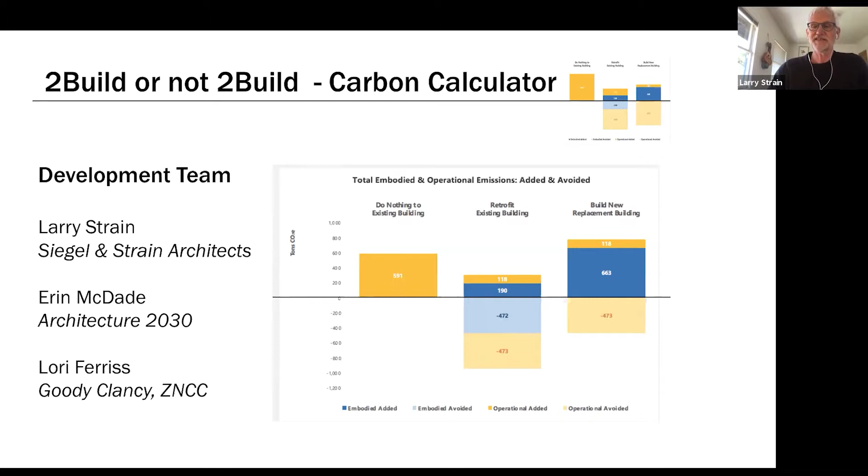Operating emissions are from existing buildings, because you can't have an emission from a building until it's built. The embodied emissions are almost all from new buildings. So one way to bring those two down is to reduce the operating emissions of existing buildings and build fewer new buildings. Remodel more buildings, which will let you build fewer new buildings, which will reduce the embodied emissions from new buildings.

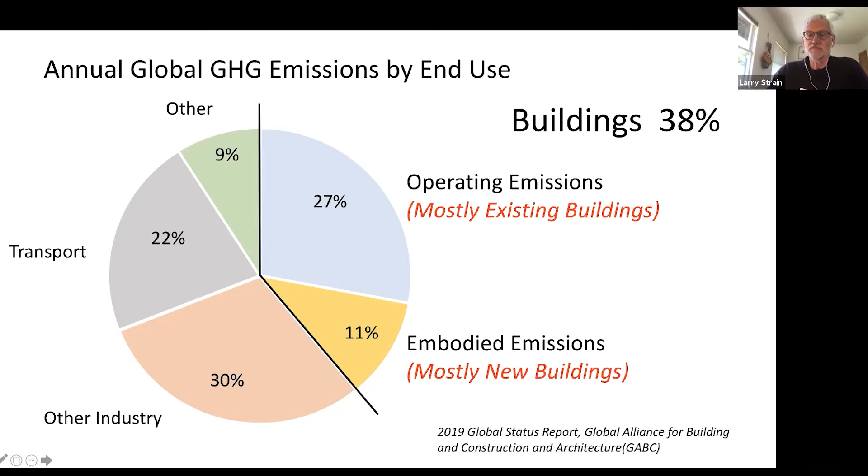Reusing and upgrading what we have is going to be a key strategy to solving the climate emergency we are in. It accomplishes these two things. The upgrade part reduces current operating emissions from existing buildings. The reuse part makes it possible to build fewer new buildings, thereby reducing future embodied emissions as well.

But to date, we haven't had a tool that could compare all the variables for embodied carbon and operating carbon over different timeframes. Retrofitting an existing building to zero net emissions will always be the lowest carbon option. But what if you can only improve its efficiency by 50%? What if you can replace it with a new net zero emission building?

Does it still make sense to retrofit, or should you build a new one? And how does climate and grid efficiency affect those calculations?

So we set out to create a simple, easy to use tool that could compare all of the carbon emissions—operating, embodied, and avoided—of a new building, a building retrofit, and an existing building. We wanted to be able to compare a variety of existing, new, and reuse scenarios over different timeframes.

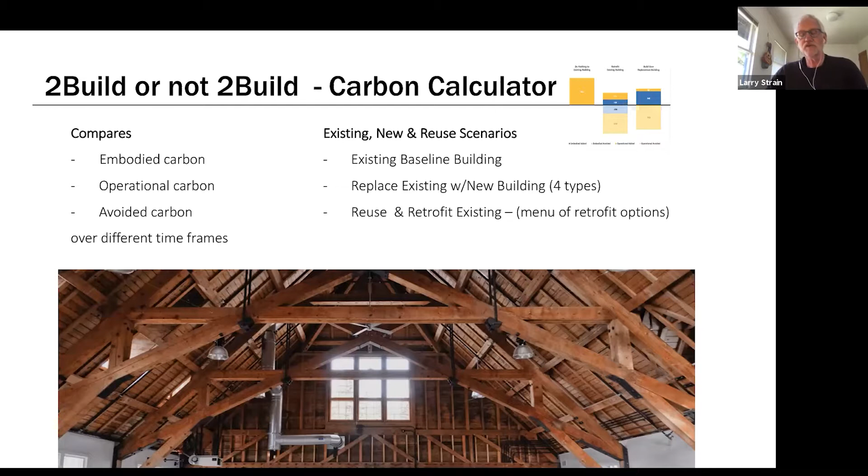I should say that the current version is really an estimating tool for planners and building owners. It's not actually a design tool that can be used by designers in the early stages. It's really to tell you whether you should be building a new building at all or retrofitting what you have.

So a little bit about the project history and how we started.

The catalyst for our calculator was an ex-employee of Siegel and Strain who was working for the Office of the President at the University of California. He called me up one day and asked me if I knew of a tool they could use to estimate total carbon emissions in the early planning stages of a project. I told him we all wanted a tool like that, and as far as I knew, it didn't exist.

Life cycle assessment tools like Tally need a building that's already designed. He wanted a tool that could help them decide whether to design and build a building in the first place.

I got to thinking about it, and I knew something about embodied carbon emissions, not as much about operating emissions, so I called another ex-employee and some mechanical engineers I knew and got some rough emission numbers for building operations, and made this very simple calculator in Excel that could also graph out the results.

So this one had a few choices you could make about your existing building assumption, what's your new efficient building. It gives you the two different kinds of emissions, embodied and operating, for different new buildings and different retrofit buildings.

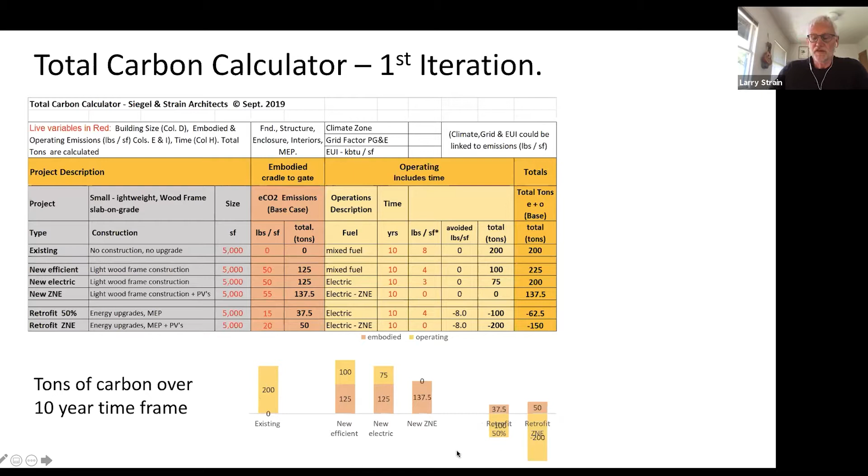So I took this calculator and showed it to the people at the Carbon Positive Conference in Chicago in October of 2019. And Erin McDade of Architecture 2030 thought it had promise and offered to help.

So it was pretty limited, but it worked pretty well, and it gave you all these different outputs, and we were pretty happy with it.

We showed it around, and there was a lot of interest in this tool, particularly from a group of historic building architects who were just forming the Zero Net Carbon Collaborative, which is a group of historic architects primarily who were really focused on existing buildings as one of the key solutions to climate emergency, climate change.

People wanted to get their hands on it, but we knew it wasn't really ready for prime time yet.

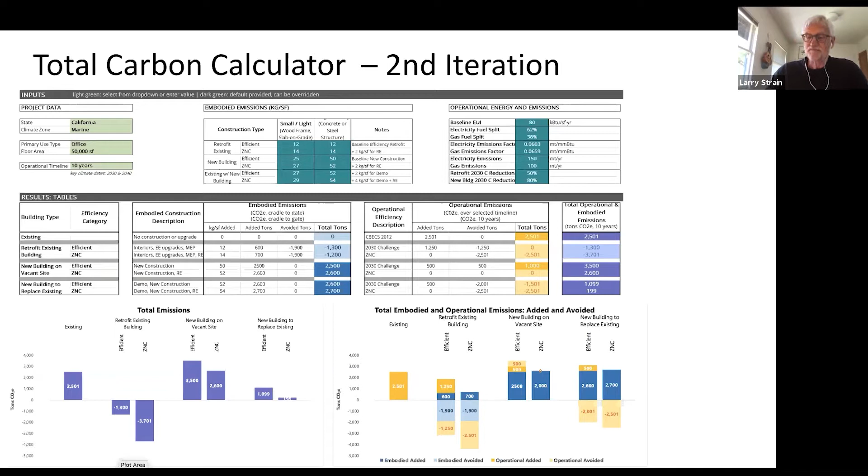So the current version—we heard about a grant. A friend of mine told me about a grant program from one workplace that was giving out innovation grants to firms working on the built environment.

In August, we applied for it and received a ONEder grant to continue to develop the tool. Erin and I added Lori Ferriss from Goody Clancy, one of the organizers of the Zero Net Carbon Collaborative, to our core team, and we put together a high-powered advisory committee as well.

We called our tool the To Build or Not to Build carbon calculator and got to work refining it. Our goals were to define the emissions for various building types of existing buildings to set the baseline, to define the emissions for a range of remodeling and retrofit options, and to define the emissions for a range of new replacement buildings, not just the two we had started with.

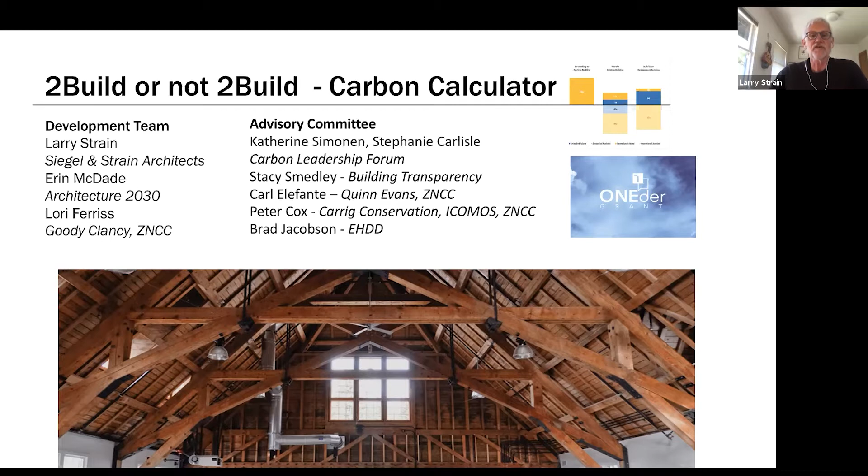So the way that the existing buildings work is there's a database out there—actually two databases. One's called CBECS and one's called RECS, the Commercial Building Energy Consumption Survey and the Residential Energy Consumption Survey. And these have been going on for a long time.

The Department of Energy, the Energy Information Administration, publishes these results every 5 to 10 years. And they do a survey of all these different types of buildings and set the baseline energy consumption for those buildings. So that gives us a place to start. If we're starting with an office building and looking at whether to replace it, we know what the baseline emissions for that building should be.

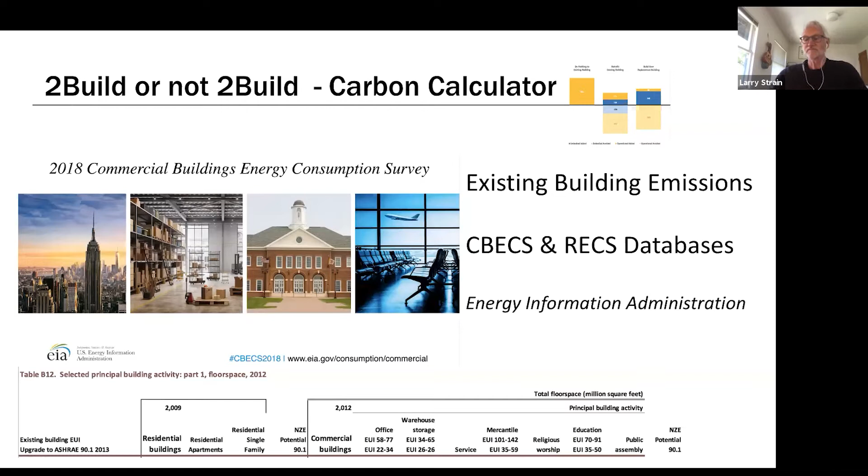Then we came up with 4 new building types. We wanted 4 distinct types of buildings that had different embodied carbon footprints. Really, these are based on size, materials, and structural systems, not really the building use.

The light wood frame building, which is typically a house but doesn't have to be, could be a commercial building, has an embodied carbon footprint of about this range. The mixed wood concrete - usually this is something like a wood frame building over a concrete parking deck for residential, low-rise residential. And we have a mid-rise concrete and steel building. And we have a high carbon building, which typically are either really tall buildings or very carbon intensive buildings like blast proof buildings and things like that.

So we had this range of buildings. You pick the building that you're thinking most matches what you would replace your existing building with. And that's where you set your baseline for the new building.

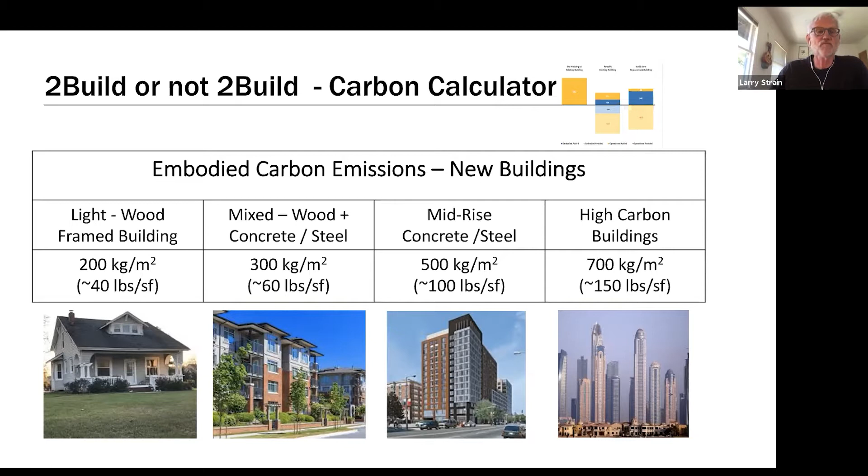Then we came up with a menu of different retrofit options for what you could do to your building. There's MEP upgrades, envelope upgrades, interiors, different types of interiors. We wanted this to stay very simple, but just to give us a quick check on what you would do to the building if you're going to remodel it. Each one of these has a different embodied carbon footprint - each box comes with a different footprint.

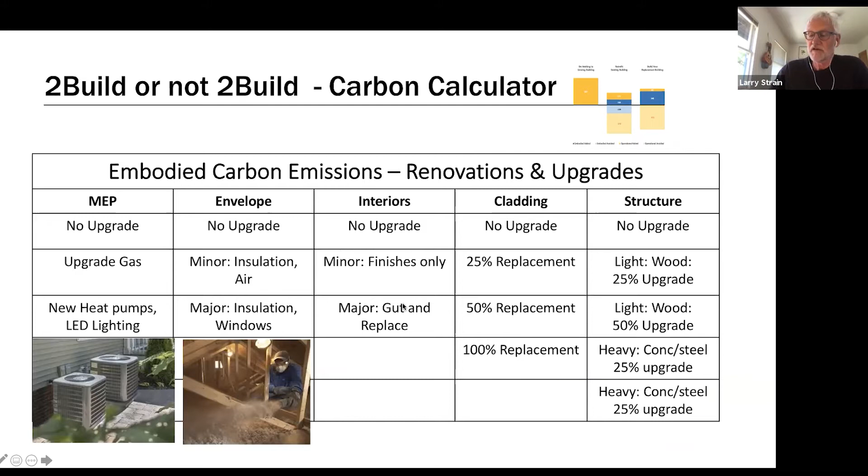Then you can set your operational emissions. Your baseline building is set by your CBECS or RECS databases. And your retrofit is just picking your target, how much better you think you're going to be than that. So your mechanical engineer, you work with that and get a sense of the new buildings basically.

So you're going for better than the existing building for the retrofit. And the new building's basically set by code average for Title 24 or ASHRAE 90.1. So these are probably about twice as good as these existing buildings to start with. That's your baseline, and then you can go from better than that - so you get to set where you think you're going to be.

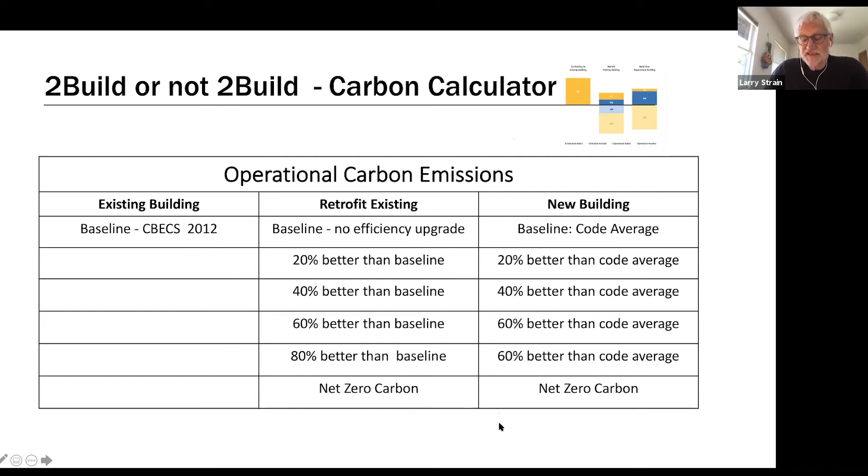And all that plots out - if you put all that data in your building, it plots out where you are. So I'm going to hand it over to Lori to show you that in a minute, but I wanted to talk a little bit about where we started when we applied for this grant.

These were our goals and the methodology we set out to look at this with. We needed to collect construction and emissions data for both new buildings and renovation projects. We needed to collect life cycle assessment data for both new and renovation projects. We wanted to then review and update all of our emission assumptions, which we'd put into this based on our own knowledge of LCA and life cycle assessment.

We wanted to add more building types than just the 2 we started with, and a lot of remodeling options. We didn't have any of those except for just building interiors. And ultimately, we wanted to convert the Excel-based calculator into a web-based tool. We haven't achieved that last goal yet, but we're well on the way to achieving all these others.

And the primary use was really high-level decision-making at early design stages. This is not a design tool - I want to make that clear. It's really to let you know, should we be building a new building or not?

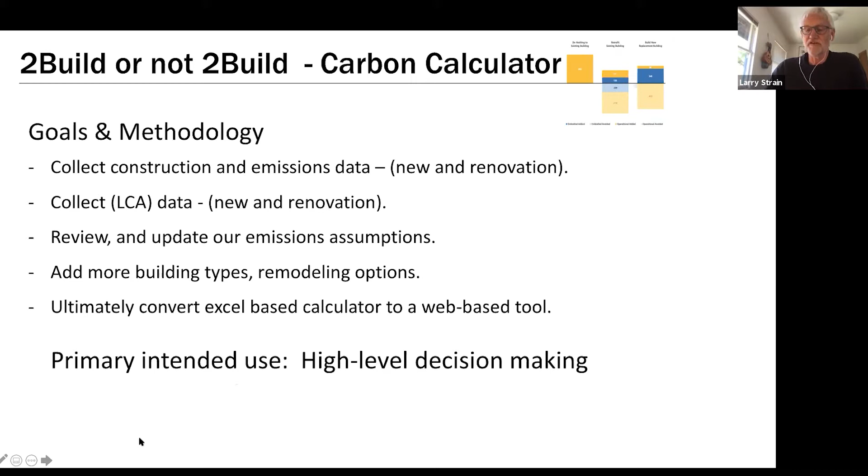So we set up some focus groups to help us sort through the data and figure out what data we needed. One of them was the energy mechanical focus group. And since we're not mechanical engineers, we mostly just asked them questions like: what are typical mechanical systems for new buildings and building retrofits? How do they vary by use, size, and climate? What are the issues with electrifying existing buildings?

And then we wanted to come up with some initial estimates for embodied carbon for each of those different kinds of mechanical systems, so we could plug those into our embodied carbon baseline. And we wanted to know some typical energy use intensities for new buildings, retrofits, and things like that. So mostly we're asking them questions, and we're now starting to get input and feedback back from this group.

At this point, I'd like to hand it off to Lori to talk about the next focus group and lead into a presentation of a project.

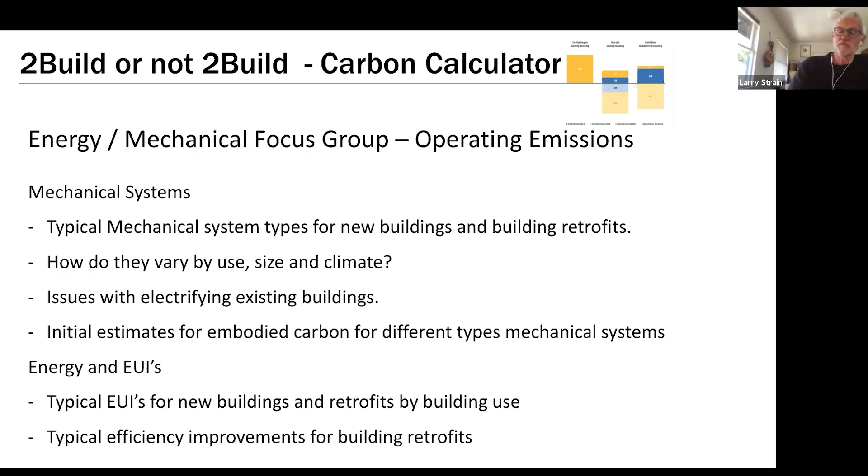In addition to the MEP focus group, we also convened an existing buildings focus group to talk to preservation and building reuse experts, to understand how the tool responds to all the parameters and challenges of reusing existing buildings. The feedback we got was similar to feedback from our primary advisory group and the MEP group: first, that the value of this tool is as a high level tool, a first step in understanding total carbon, not as a design tool. That was important to keep as a focus.

One request was to allow users to understand which factors within those drop-down menus have the biggest impact. So if you're going to reuse a building or build new and want to do better, what are the levers to pull to really show improvement?

Again, going back to interface, it's really important to see all of the options and results on a single page so it's very easy to understand and digest.

Consider this next point: consider ranges rather than absolutes. It's about providing drop-down selections that reflect what people are seeing, because the people using this tool may not be technical experts. It's important that they see options that reflect what they're familiar with and what their project actually looks like.

And the last point is about coordinating with other embodied carbon tools out there. There are existing LCA tools, and a lot of design tools and life cycle assessment tools being developed. So how do we make sure the data is all aligned so you can move seamlessly from one tool to the next and really compare apples to apples?

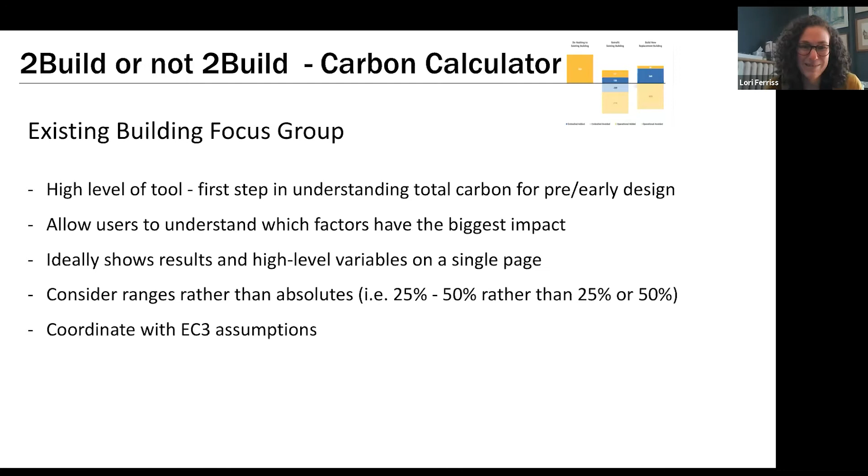Next. Oh, am I? Can you keep advancing? I have to advance, is that right? Yes, there we go. Next slide, thank you. Thanks.

So this is where we landed. This is the current Excel user interface of the carbon calculator. You can see on the left side those gray boxes are all the inputs, which I'll walk through, and on the right side are the results. This is, at the top, the general project and building information.

Below that is a box about the renovation: what's the scope of the renovation and what kind of energy efficiency are you aiming to achieve? The next box is all about the new building, the hypothetical replacement building. At the bottom are embodied emissions modifiers. These are important because there are factors like poor soils or blast resistance that really impact embodied carbon, but it's impossible to capture all of them in a drop down. So the point of these is to allow you to check a box that makes this simple tool as broadly applicable to a wide range of projects as possible.

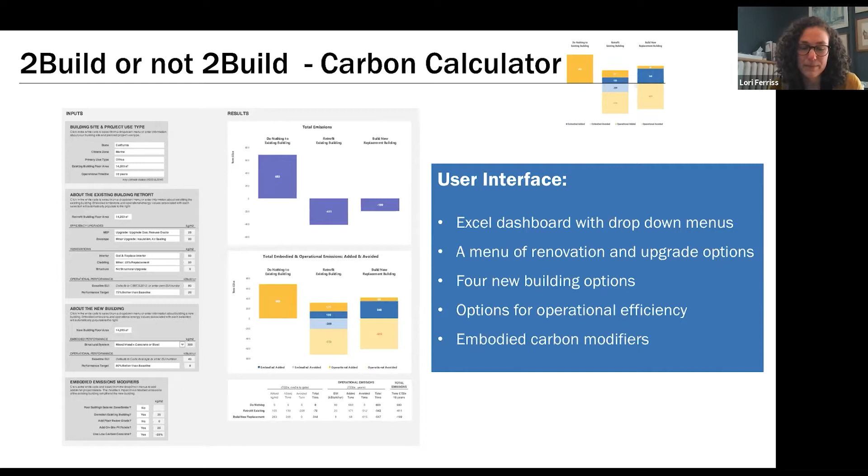Okay, so I'm going to walk through a project example to show you how this works. The building we're looking at is a 1950s international style building, which was purpose-built as a Hillel Center for Boston University and was renovated in 2014 into an admissions center.

This was a comprehensive renovation. It included completely reconfiguring the interiors, and it also involved a lot of performance upgrades: new high performance glazing, insulation at all the walls as well as the roofs, and new high efficiency building systems. But through all of this work, the majority of the original structure and enclosure were preserved and restored. Through the project, the operational efficiency of the building was improved by 70%.

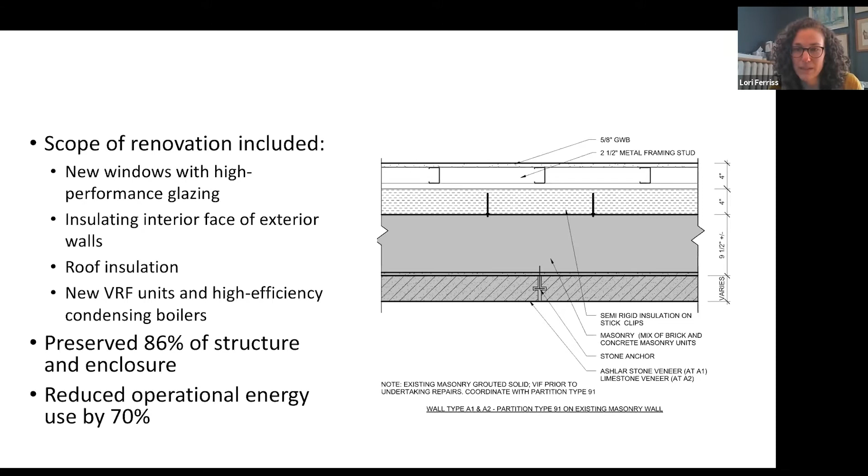Okay, so we can start to enter this, model this using the tool. That first box, the project information, we start with the location, which pulls from that CBECS database the climate zone you're in. We then ask for the primary use type, and the CBECS use type gives you a range of what the expected energy use might be based on what the building is primarily used for. And then square footage and operational timeline.

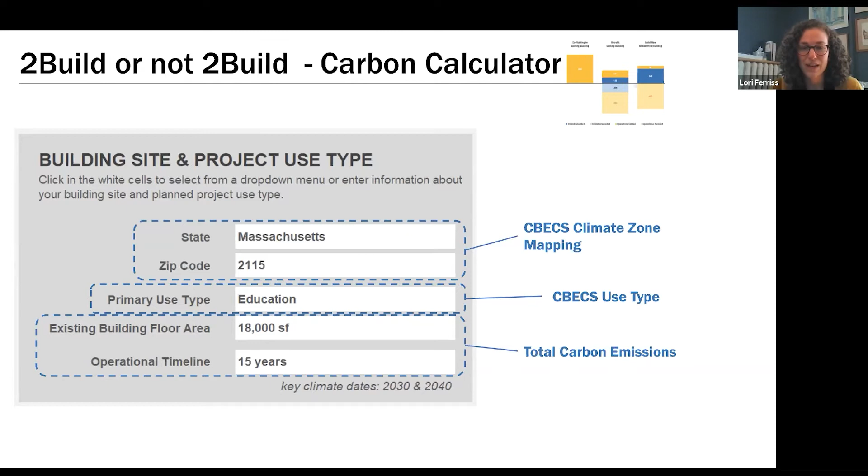The operational timeline is really important because when we're talking about the need to get to carbon neutral by 2050, and to make greater than 50% reductions within the next 10 years, it's important to define that duration we're looking at for total carbon emissions.

So here we're saying 15 years. These are all about the renovation. So both for the renovation and new construction, we have a floor area box where you can enter the floor area, and this is because we know that typically when you reuse a building, the floor area changes. And if you demolish and replace it, you're likely adding square footage. So we want to be able to capture that variable here.

The next set of efficiency upgrades and renovation drop-down menus are all about embodied carbon of the renovation. So this gives you options for what different renovation strategies might look like. In this case, for example, we're replacing all of the MEP systems. We're doing a major upgrade of the envelope. We're gutting the interior, et cetera, and each of those decisions results in some embodied carbon emissions.

And then at the bottom, you can input your operational performance, and here we're showing 80% better than baseline, but this is really the performance target, or what level of energy efficiency you're aiming for, which then the calculator converts to operational carbon emissions based on your locale and your grid data. Next.

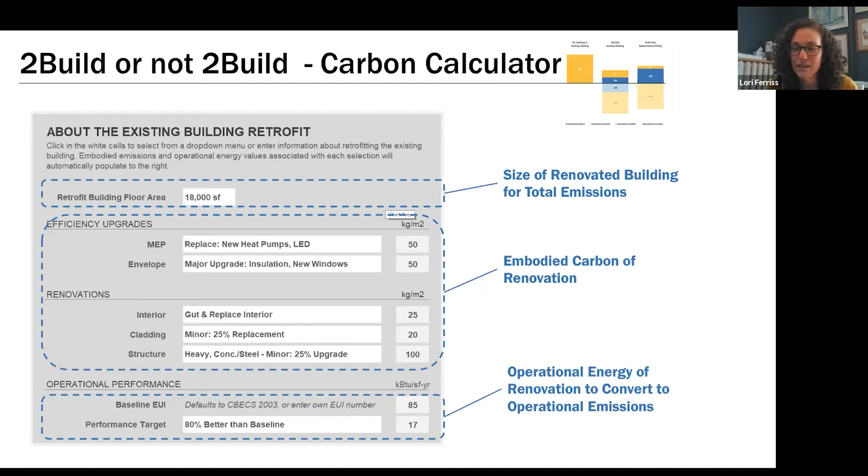The next input box is about the new building. This one's a little bit simpler. As Larry mentioned, we provide the floor area here, and then you choose from one of those four building types. So here, this is that mid-rise concrete or steel, typical construction, and then the performance target.

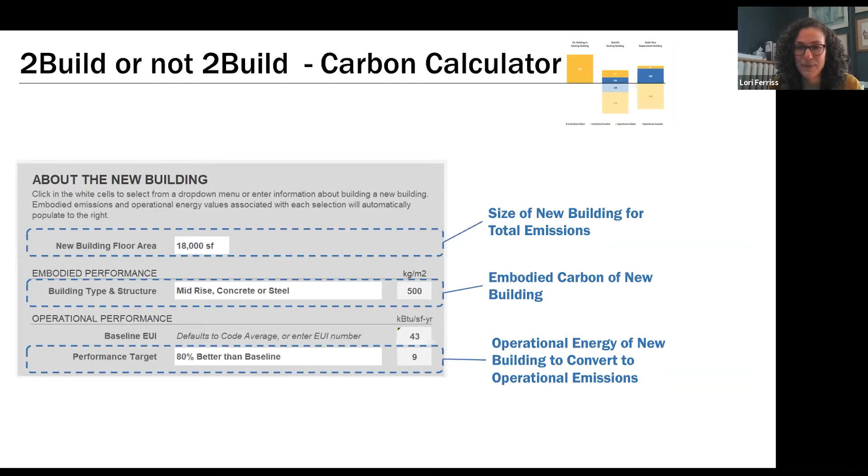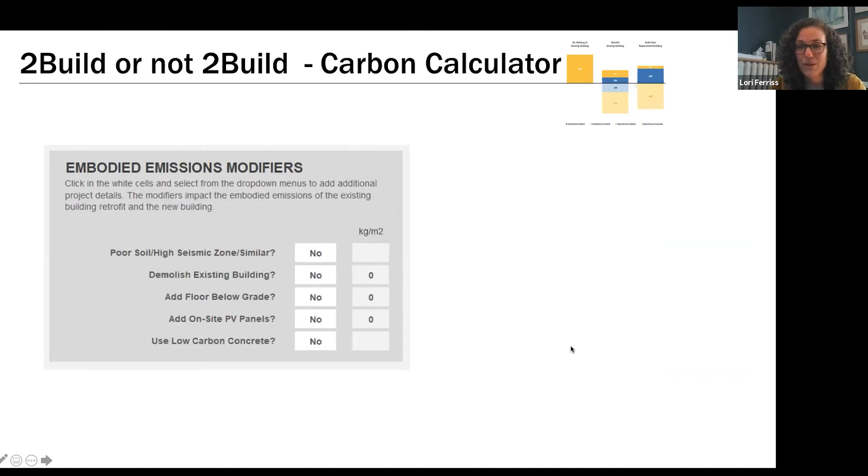And here I'm comparing this to an 80% better than baseline. So this is almost a net zero building. Just for the sake of comparison, we're saying that this is a very, very high performance new building. Next. And in this case, there aren't any embodied emissions modifiers, but you could imagine that, if we had used low carbon concrete, for example, the embodied carbon would go down, or if we had poor soils, it would go up. Next.

And the first chart, this is one of the result charts. I'll start with the more detailed one to walk you through. You can see these three columns. On the left is total carbon emissions over that 15 years that we input. On the left is the existing building if you do nothing to it. In the middle is the retrofit scenario that we defined. And on the right is the replacement scenario.

You can see in the dark yellow and dark blue are the embodied emissions and the operational emissions. So these are emissions that are coming from each of these projects. And then the light blue and the light yellow are the avoided emissions. So these are all of the emissions that we're saving essentially by the decisions we make. So, for example, the existing building has no blue if you do nothing to it because there's no embodied carbon added. It's just operating as it always has been.

Whereas if you retrofit a building, there's some embodied carbon emissions. And if you replace it, there are usually substantially more embodied carbon emissions. And then looking at those light numbers, you're avoiding operational emissions by improving energy efficiency, and you're avoiding embodied emissions by reusing the existing building fabric rather than replacing it with new material. Next.

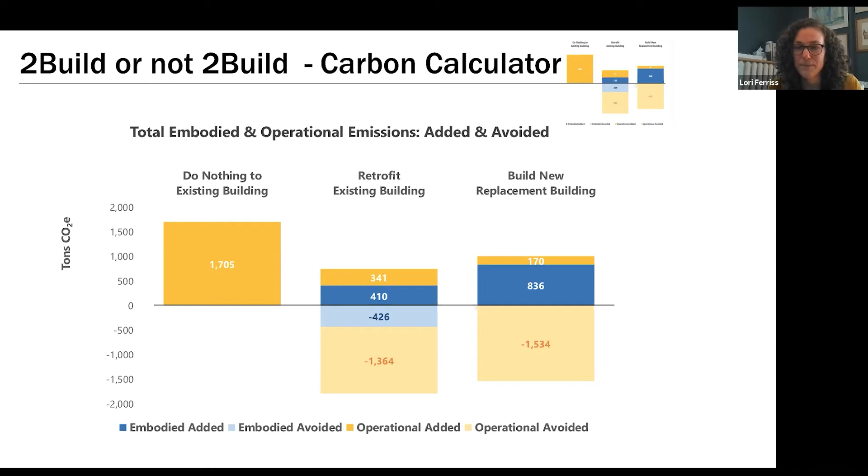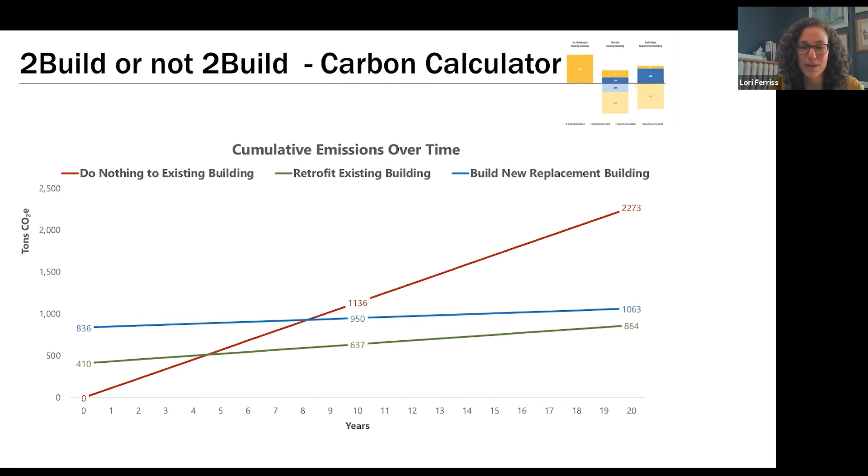So in this case, reusing the existing building is the lowest carbon option for the next 20 years. But you can imagine how the embodied carbon, so that starting point and the slope, might change depending on those different decisions or drop-down menu selections you make.

Next slide. So that's where we are now. This is still a work in progress. There's plenty to do, and we're still working. So next slide. We've started to solicit feedback from our beta testers. We've sent the spreadsheet as it is to those people in our advisory groups, as well as others who have been helping us along the way.

We've received some feedback. First, about interface. It would be nice to be able to compare options. And I'll preface this by saying that most of this feedback comes from technical experts and practitioners, especially. So we found that people want more detail and more options for their own use. They like to see multiple renovation options against each other. We definitely understand that it would be helpful to have more mechanical systems options, so that when you select something in the dropdown, it reflects the choices that you're actually presented with in real life.

People would like to be able to enter their own energy use intensity and embodied carbon rather than have those as dropdowns, so that if they have that data, they can input it. And we've had many requests for an advanced user option, whether that's a separate tab or, in a web interface, a button you could check that allows you more granularity. And again, as Larry mentioned, this is not a design tool, but the more we talk to practitioners, the more they would like some design tool capabilities here. So that could be a next step.

And then on the data front, we've had requests to incorporate future grid emissions data, because we know electric grids everywhere are becoming cleaner. So linking to databases to reflect that, as well as using location to tie to local energy code requirements and data so that the energy performance inputs are less of a guess and more based on the requirements in your jurisdiction.

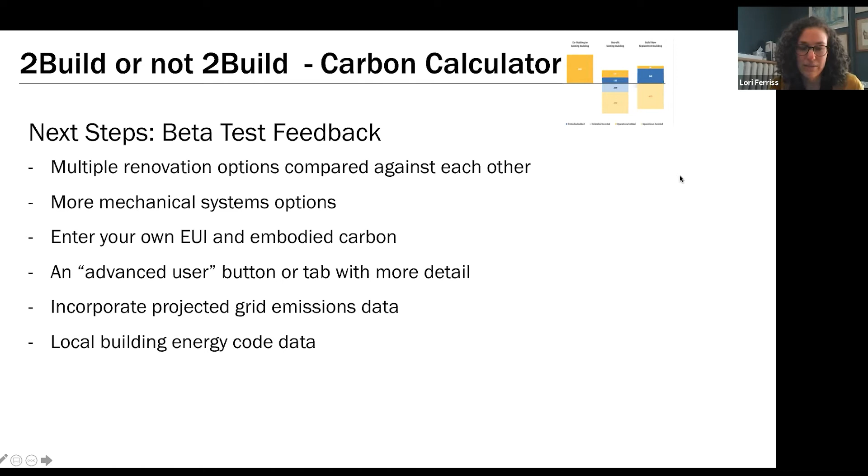Next. Let's see here. We're also collecting data. There are a lot of data assumptions built into this calculator, and we're trying to validate them by collecting information about real projects that practitioners are providing to us. And this ranges from data that you see reflected in drop-down menus, but also deeper data so that we can make sure we're showing the right drop-down menus, that we're correlating the selections to the right data, the right outputs, that sort of thing.

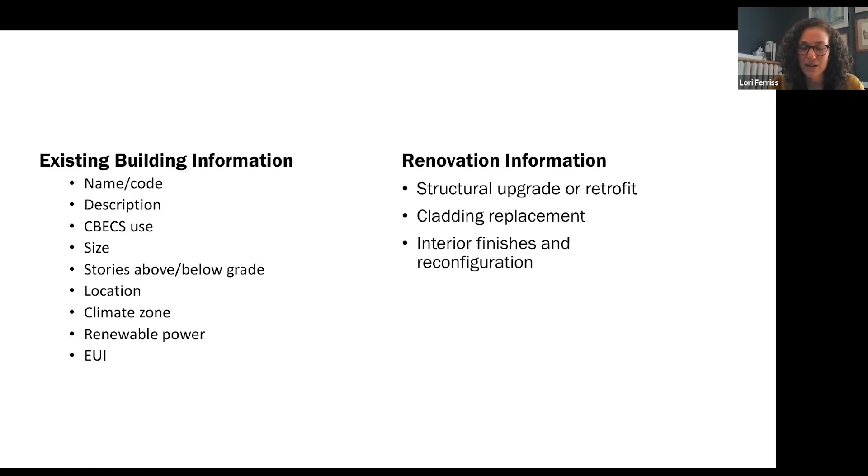So next slide. I'm showing what we're asking for, just so you get a sense of the detail that we're requesting. So a lot of existing building information here, renovation information: what's the strategy you're taking and how much material are you replacing, what level of structural and cladding replacement and upgrade, and what are you doing to the building interiors. Next.

Efficiency upgrades, what are you doing? How are you treating the envelope? Are you improving the windows, and what strategies are you using? Are you applying insulation? What kind of systems are you using? And then even what are the attributes of your building envelope? So, what R value have you achieved with your walls, that sort of thing, so we can really make sure we're building in the right data to the calculator.

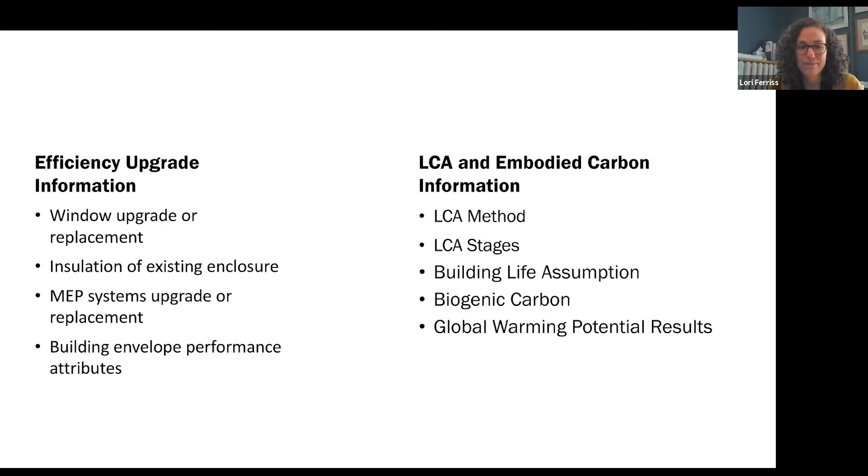And lastly, life cycle assessment information. And this is probably the biggest gap in existing data, but really understanding the embodied carbon associated with different building reuse decisions in particular, so that we make sure that we're accurately reflecting the embodied carbon of the retrofit scenarios within the tool. That's it. Ready for questions?

All right. Thanks. Sorry, I had a little bit of technical difficulties there. I apologize. Thank you, Lori and Larry. That has given us actually a lot to think about. So I do have a couple questions through the Q&A chat, but Sarah, I am going to pass this off to you. Yeah, hi, I'm Sarah Pearson. Lori and Larry, thank you so much. You gave us a lot to process.

I would like to ask you a little bit about the audience. You talked about how a lot of your first rounds of feedback have come from subject matter experts. And I was curious what you envision moving forward with the tool. Yeah, I think that we've said that this tool is really designed more for developers and building owners and planners because it's that kind of level.

But to be frank, it's hard to get input from. We haven't had as much input from that group as we'd like, so we'd like that group to start to test it out. One group that might be great to send it back to now that it's at this stage is the University of California, since they came to us and said, we need a tool to look at all the buildings on all our campuses and see what we should be doing with it.

And I think this tool has the potential to look at whole portfolios, not just single buildings. So you could take a portfolio of buildings, and University of California could take all their dorm buildings and assign it one embodied carbon level, and then just say, what would we do if we remodeled these or replaced them all? What would that look like? And I think that's probably the next step, is to get those kinds of people and maybe city planners involved in really vetting this tool to see if it works for them.